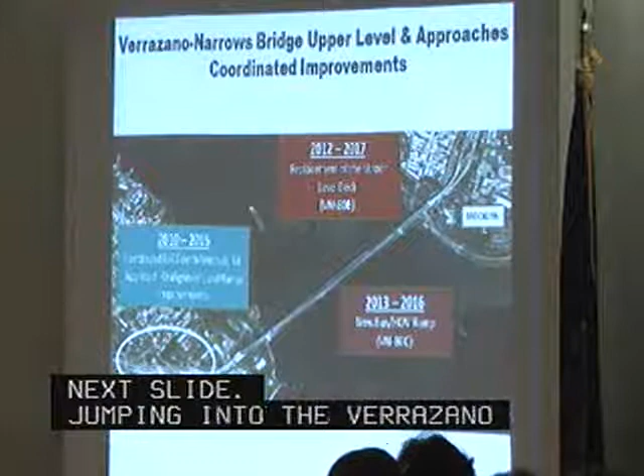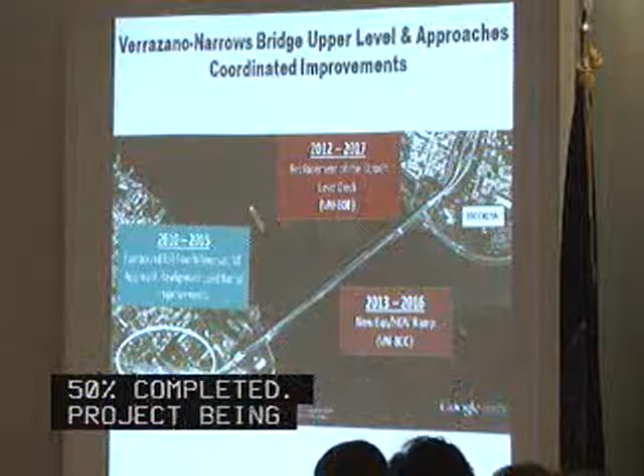So jumping into the Verrazano Narrows, this is an aerial view. To the bottom left, as you look at it, is the toll plaza area in the blue-green color. Currently, there's a toll plaza interchange project going on there. It's about 50% complete. The project's been implemented with close cooperation and under a MOU framework with New York State Department of Transportation to implement complementary improvements on the Staten Island Expressway.

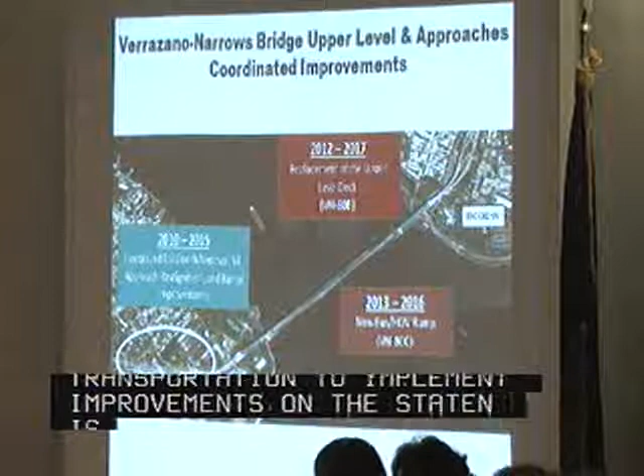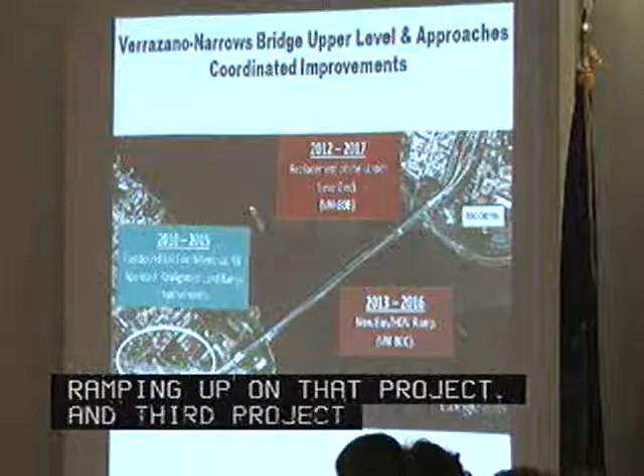The main span project on the top there that says 2012 to 17, replacement of upper level deck, is the major project we're going to be talking about today. That's VN80B. That project was awarded a few months ago. We're in the early stages of mobilizing and ramping up to get going with that project. And the third project shown there, which really should have something pointing to the Brooklyn side on the top right, is the bus HOV ramp improvement project, which we'll also discuss.

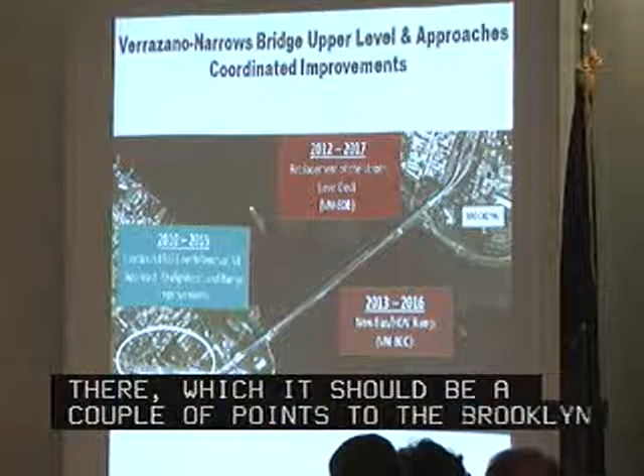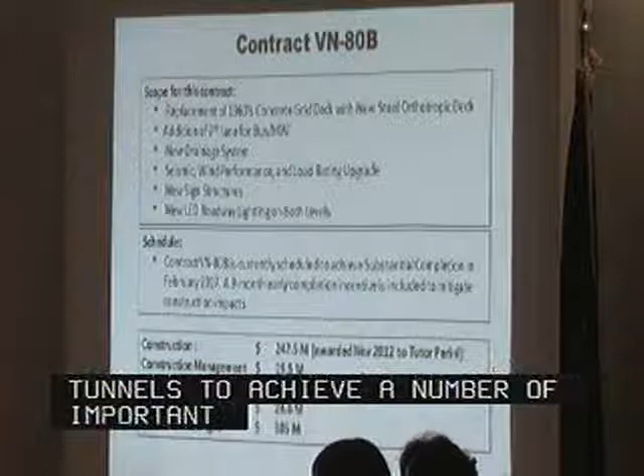Jumping into VN80B, it's a replacement of the 1960s concrete filled grid deck with the new steel deck. This project enables bridges and tunnels to achieve a number of important goals. The main one, I think, for regional importance is, by reconfiguring the upper level geometry, we were able to add a seventh lane on the upper level, and as you will see, that allows us to create a reversible bus HOV lane on the upper level of the bridge.

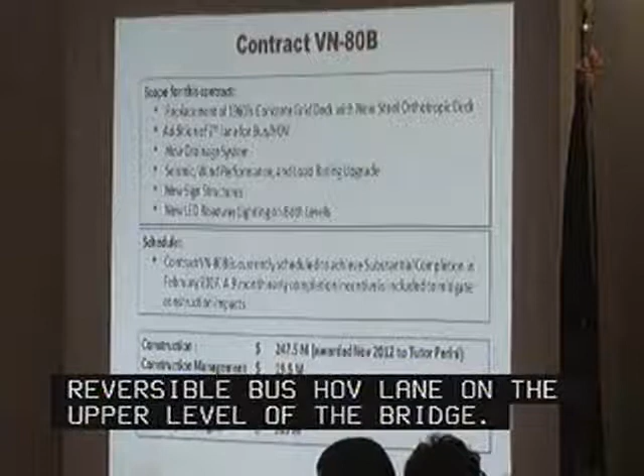We're replacing the drainage system. We're upgrading seismic, wind performance and load rating of the structure, which will help with its long-term resiliency and performance, and new sign structures and new energy-efficient LED roadway lighting on both levels will also be implemented as part of this project. I mentioned the project was recently awarded. You can see the budget information on the bottom. Overall budget, $305 million.

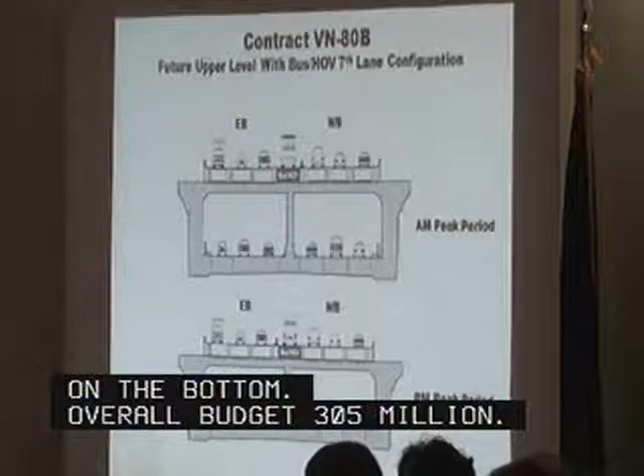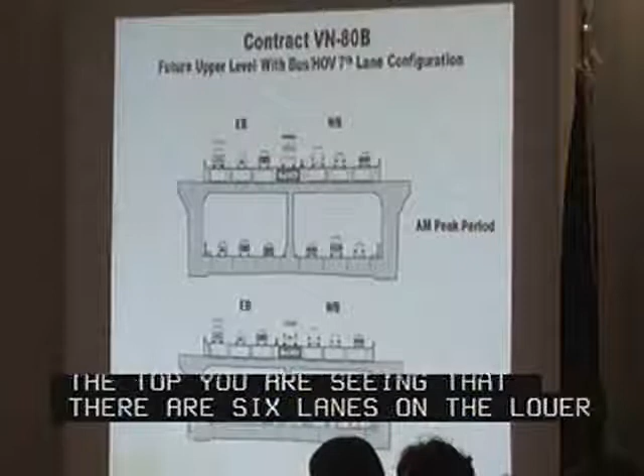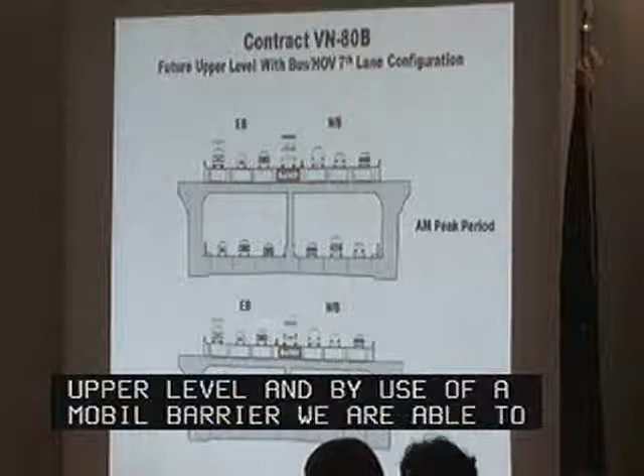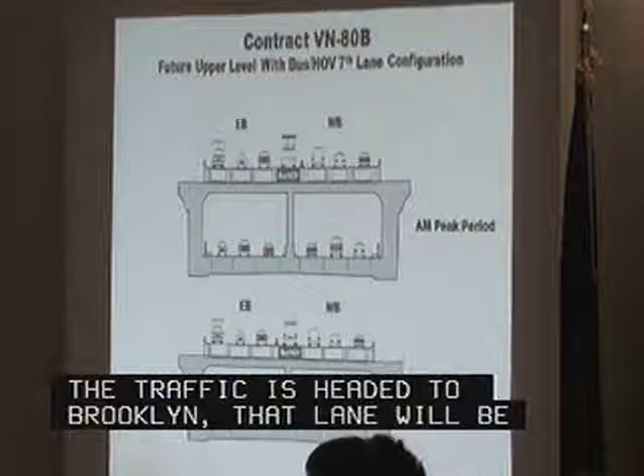This cross-sectional view on the top, you see that there are 6 lanes on the lower level, eastbound, westbound. Nothing changed there. But on the upper level, you'll see there's a new lane, so to speak, that's created in the center by taking out the median that currently exists on that upper level, and by use of a movable barrier, we're able to create a 7th lane. And in the AM peak period, when traffic is heading from Staten Island to Brooklyn predominantly, that lane will be operated to favor the predominant traffic direction towards Brooklyn, and conversely in the afternoon, evening rush hour, it will favor the Staten Island bound outbound traffic.

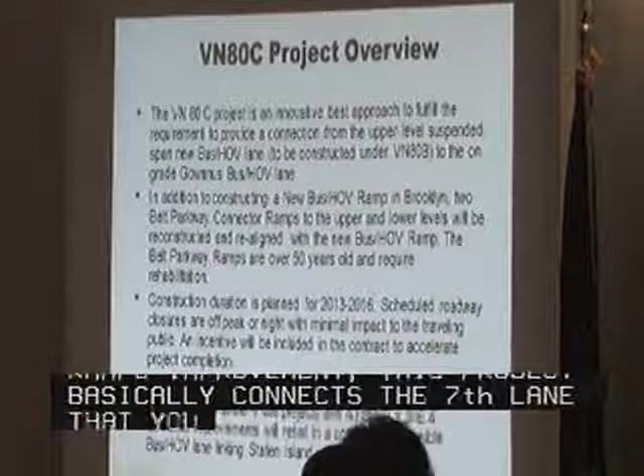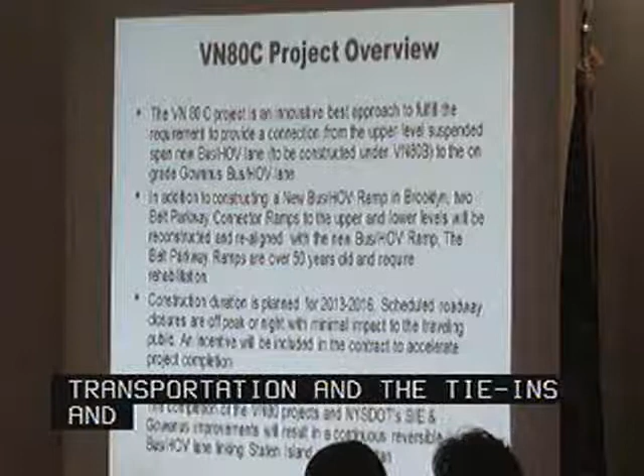The VN80C project I mentioned, that's the bus HOV ramp improvement. This project basically connects that 7th lane that you just saw from the upper level and takes it all the way down to the Gowanus Expressway, where it joins up with improvements that are currently underway being implemented by New York State Department of Transportation. And again, the tie-ins and the work necessary for the two projects to dovetail have been worked out in detail between the two agencies and are part of a regional agreement and MOU for these improvements.

The project involves creation of a new ramp, which you'll see illustrated in the next slide, and it is currently out for bid. We anticipate getting it awarded mid this year, or by the latest 3rd quarter this year, complete in 2016. We anticipate, because it's mainly new construction of a new ramp, and it doesn't interfere with the right-of-way until you make the final tie-ins to connect to the mainline structure, that there will be minimal impacts on our customers as we're implementing the project.

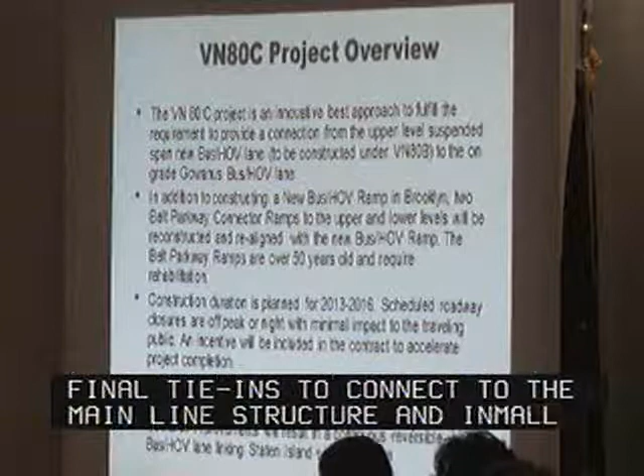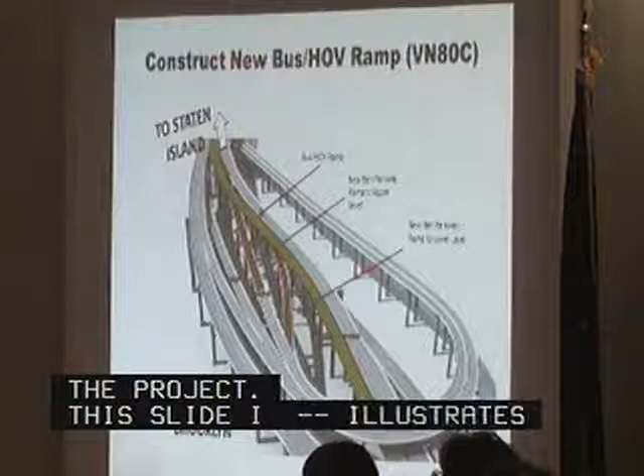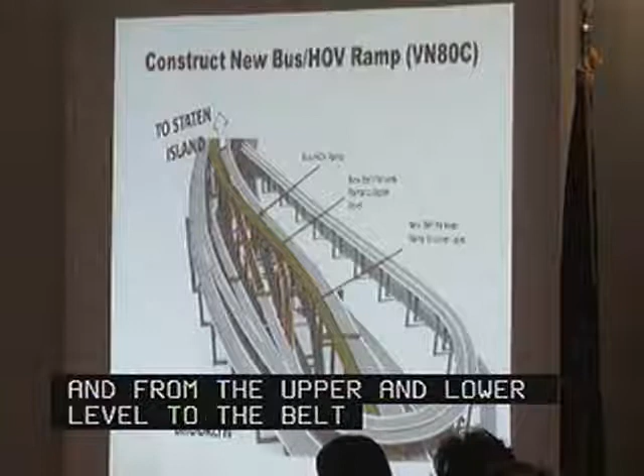This slide illustrates the ramp. Basically, what you're looking at here are the approach ramps to the Verrazano on the Brooklyn side of the bridge. There's quite a lot of ramps going to and from both the lower and the upper level of the bridge to the Belt Parkway and to the Gowanus Expressway. And highlighted in green is the new bus HOV ramp; the top of the slide is the main span, sort of the Staten Island side, and the bottom of the slide is heading towards the Gowanus Expressway in Brooklyn.

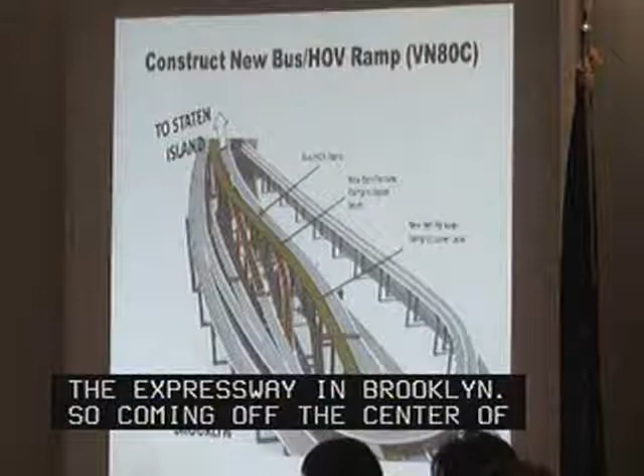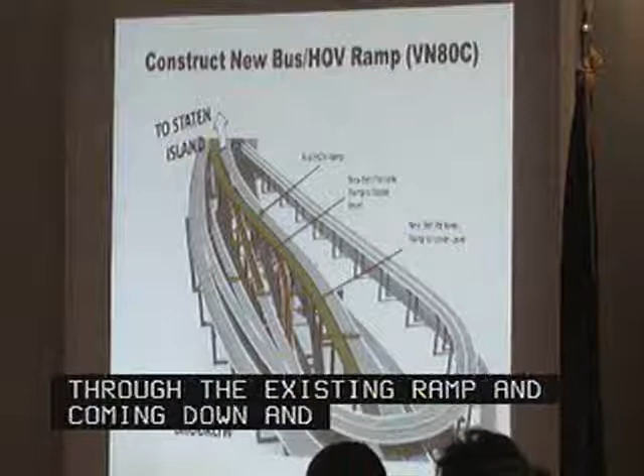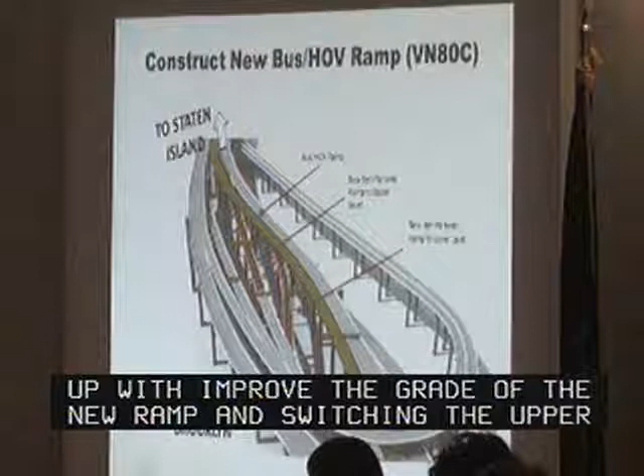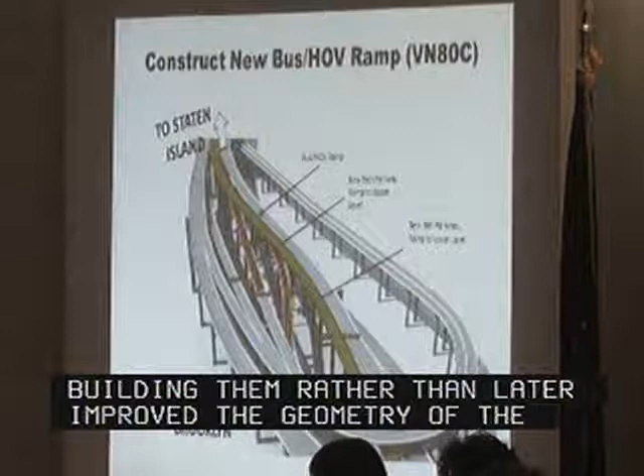So you're basically coming off the center of the upper level of the bridge that we just saw earlier, and with this new ramp, you're threading your way through the existing ramps and coming down and touching down onto the Gowanus Expressway. The two ramps that are shown in the brown color are new replacements of pieces of the existing Belt Parkway ramps. This was an innovative solution that we came up with to improve the grade of the new ramp by switching the upper and the lower level ramp connections and rebuilding those ramps now rather than later. We were able to greatly improve the geometry of this improvement, and it is an example of what we would characterize as a best value strategy in implementing the capital program. Next slide.

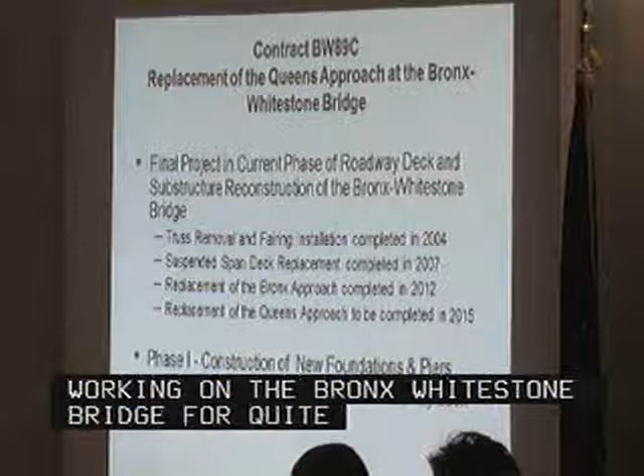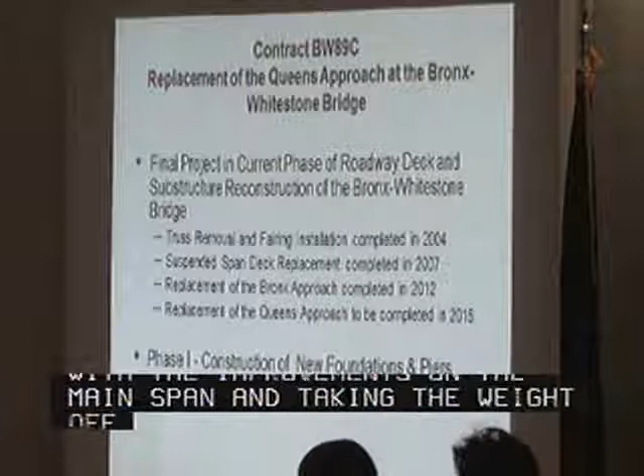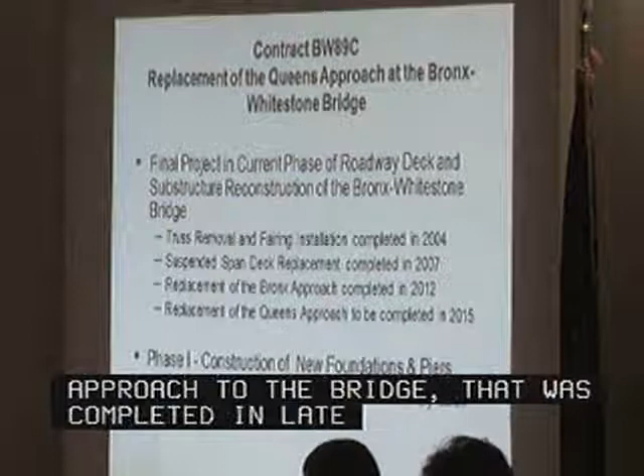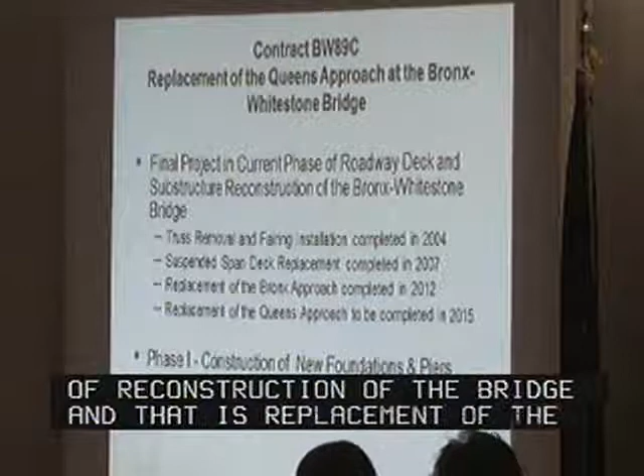Moving to the Bronx-Whitestone, as the committee knows, we've been working on the Bronx-Whitestone Bridge for quite a while. We've undertaken major work back in the early 2000s with the improvements on the main span, taking the weight off the suspended span by removing the truss, installing aerodynamic wind fairing to improve wind stability. That was in 2004. That was followed right after that by a suspended span deck replacement in 2007. We just concluded a complete replacement of the Bronx approach to the Bronx-Whitestone Bridge. That was completed in late 2012. And we're now in the final phase of the current major program of reconstruction at the bridge, and that is the replacement of the Queens approach, which is to be completed in 2015. The project really has three distinct phases.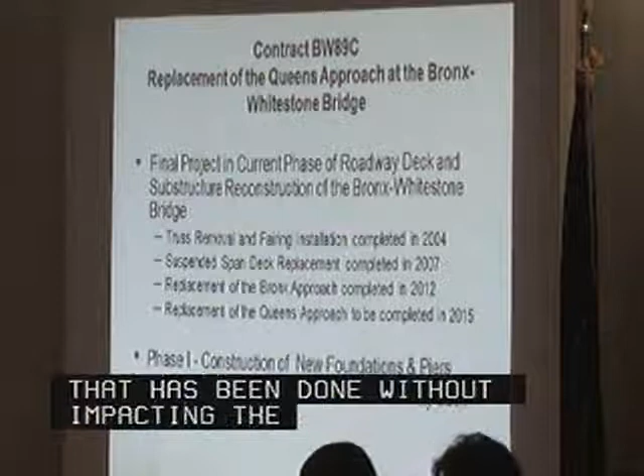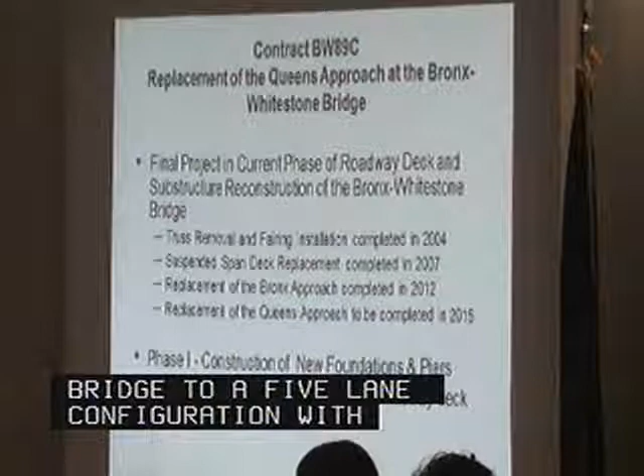We've completed the first phase, being construction of new piers and foundations. Basically, that's been done completely without impact to traffic under the existing structure. There's a phase two when we start actually working on the roadway. That's about to kick off in early June, when we'll be reducing the bridge to a 5-lane configuration with a 3-2 configuration favoring the predominant traffic direction, and a final phase 3 where we demolish the old substructure and finish out the project.

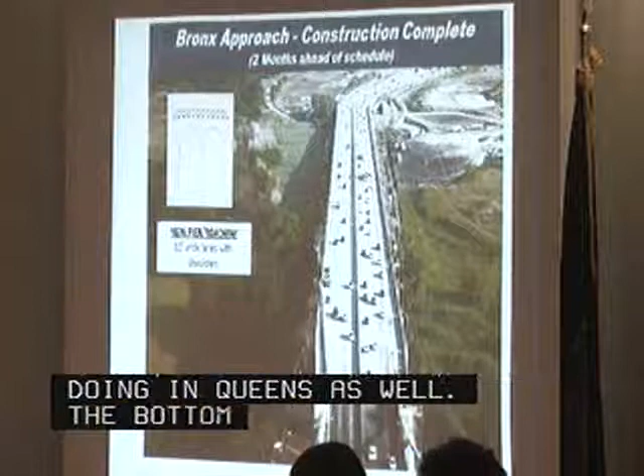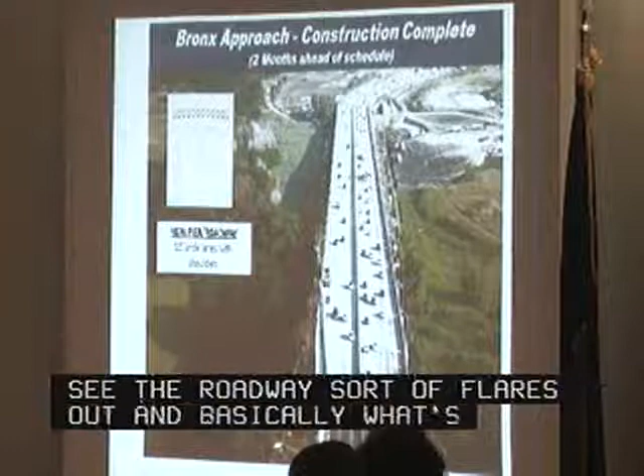This is an aerial view of the Bronx approach replacement, but it's illustrative of the kind of work that we'll be doing in Queens as well. The bottom of the picture shows the Bronx anchorage area of the main span, and then you see that the roadway sort of flares out, and basically what's happening there is we're widening out the structure to create 3 standard 12-foot lanes and a shoulder to meet modern standards. So we're having to build out from the existing choke point at the suspended span and create a wider structure.

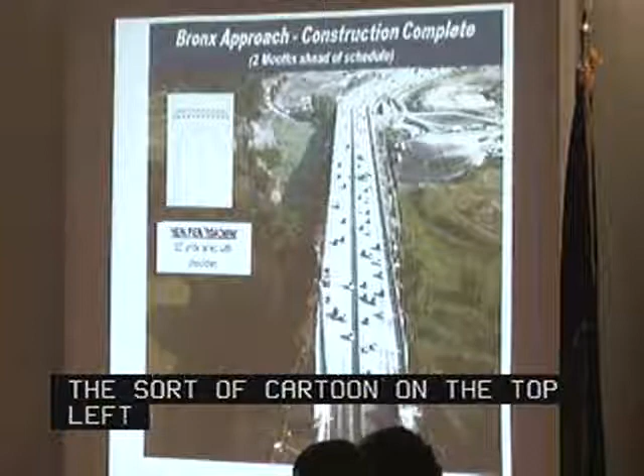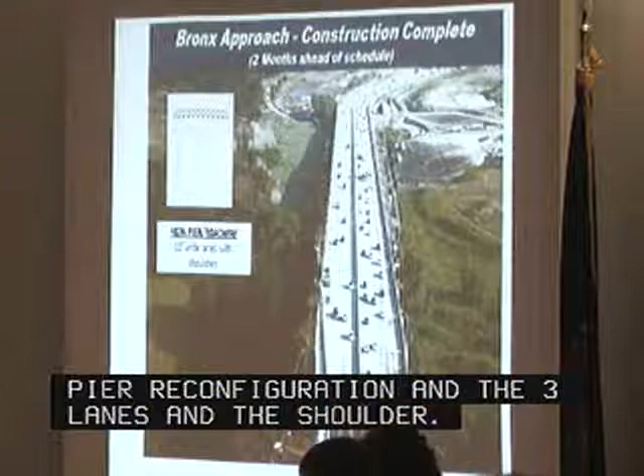The sort of cartoon on the top left illustrates the new 3-pier configuration with 3 12-foot lanes in each direction and a shoulder. The 3-pier system represents a big improvement in the redundancy and the resiliency of the structure. It used to be a non-redundant 2-pier structure.

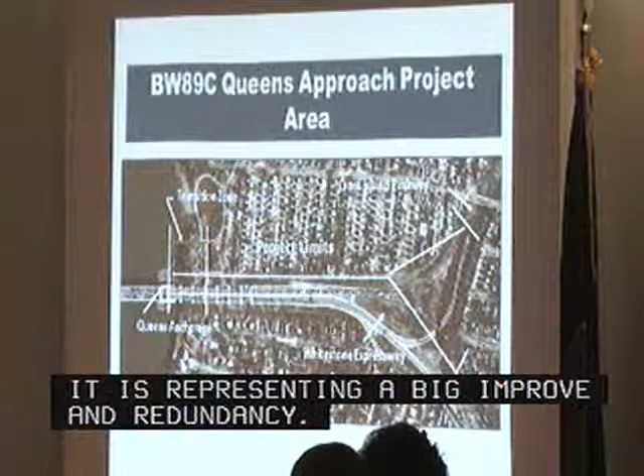The project that we're talking about today, the Queens approach replacement, these are the project limits. Basically, to the right, you have the ramps coming off the Cross Island Parkway and the Whitestone Expressway. These are on-grade ramps that are also being rehabilitated as part of this project. And then you have about a 1,000-foot long viaduct structure that's being completely replaced. And the project limits are more or less at the Queens anchorage on the left side of the slide.

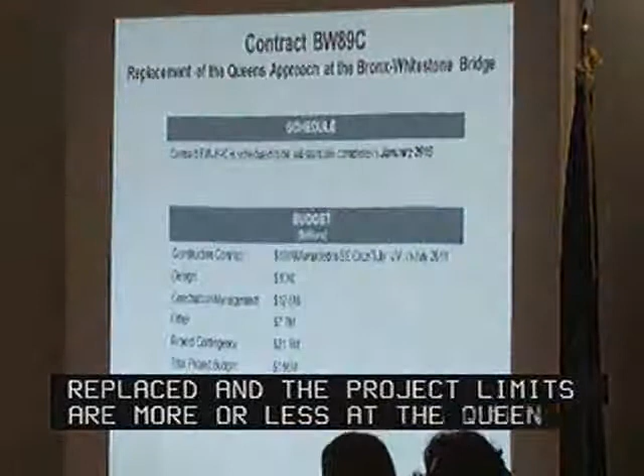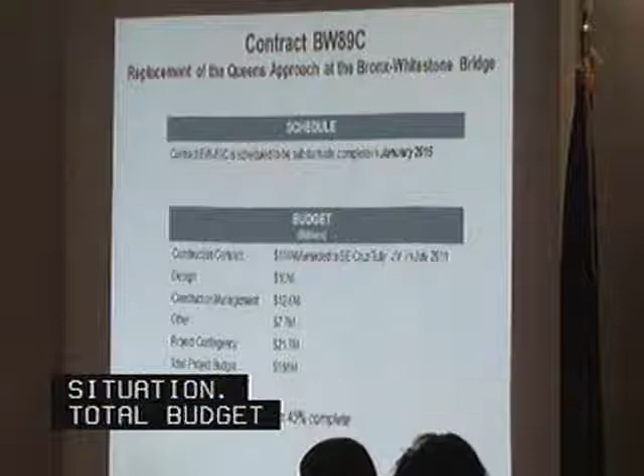And this shows the budget situation. Current total budget's $166 million. Project's about 45% complete. We're still on target to meet the substantial completion date of early 2015.

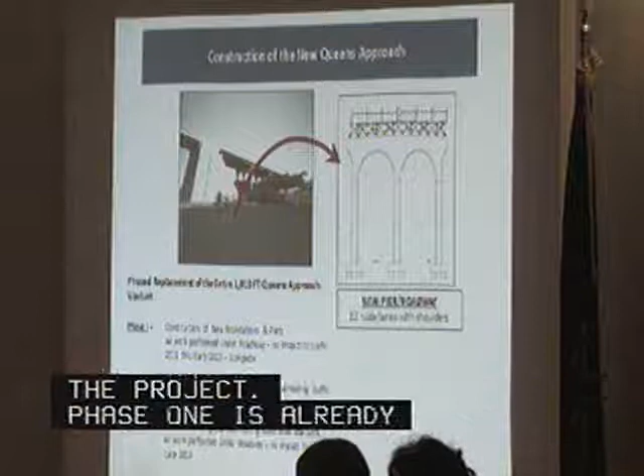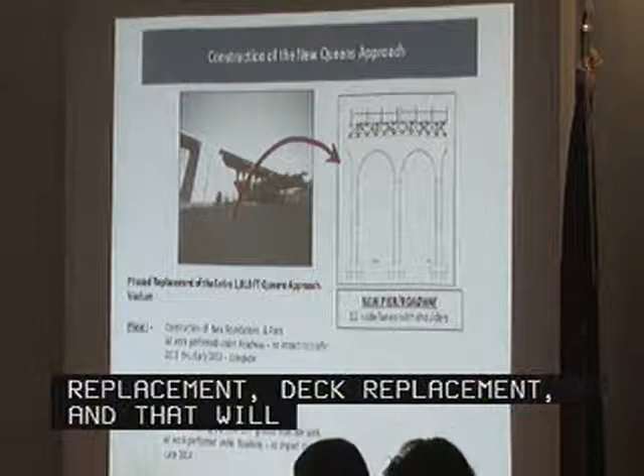Again, this sort of illustrates the three phases of the project. Phase 1 is already complete. The new piers have been installed, and now we're starting the roadway deck replacement, and that will run into late 2014, and then we'll finish up by 2015 with the final phase of the project. And again, we'll have 3 standard 12-foot lanes and shoulders on the Queens side as well.

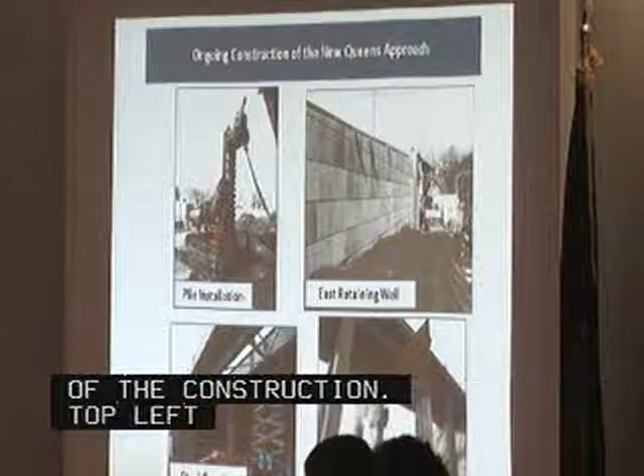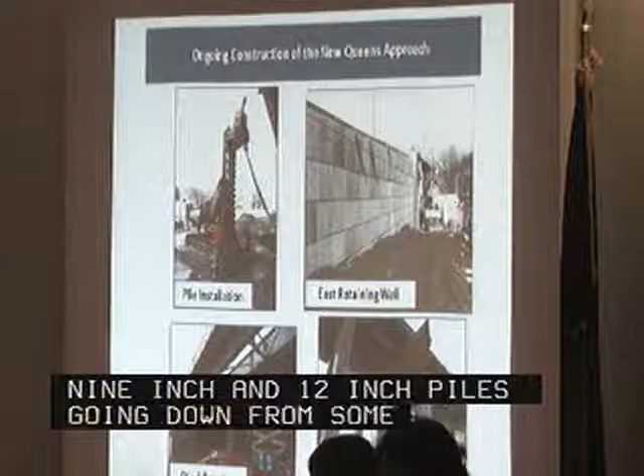Just some photos depicting some of the construction. The top left, you have the augering in of the mini piles. The mini piles are 9-inch and 12-inch diameter piles that go down, some as deep as 85 feet. They're installed in clusters and provide the substructure support for the new pier system. The top right is the new retaining wall being installed.

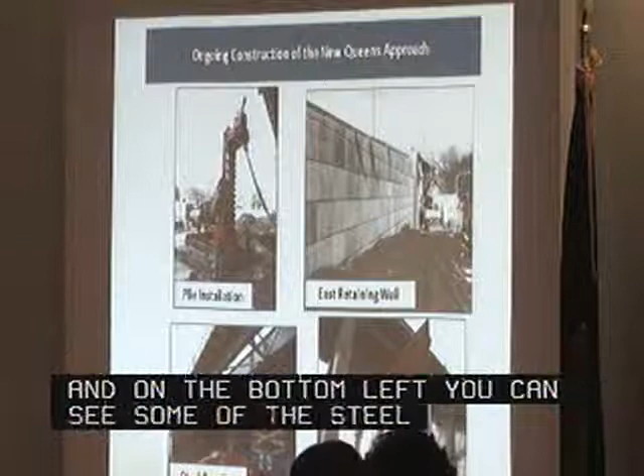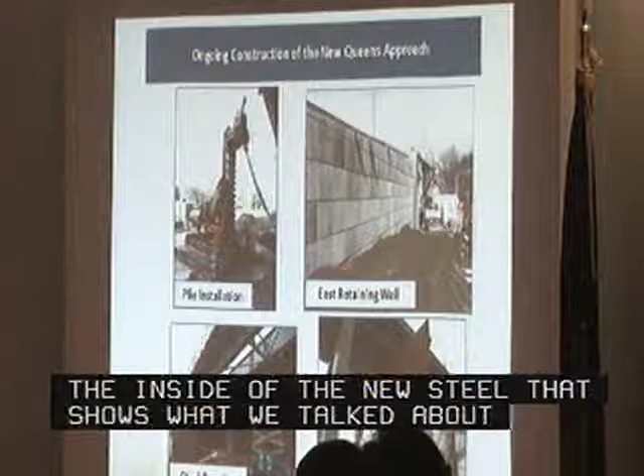And on the bottom left, you can see some of the steel erection work going on. You can see in that picture the existing pier sort of on the inside of the new steel. That shows what we were talking about, that the existing structure is being maintained in place while traffic runs on it, while the new structure is coming out of the ground literally underneath the structure, and eventually we transfer the loads over and put the new structure in place, and then we can rip out the old substructure.

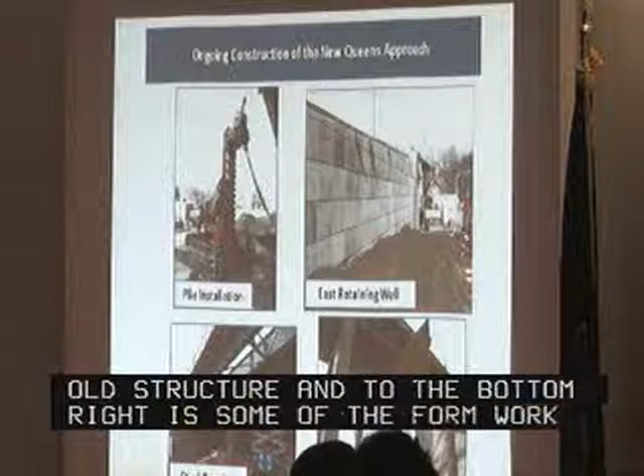And to the bottom right is some of the formwork for the concrete for the new piers being set in place, where again you can see the new substructure being built under the old existing structure.

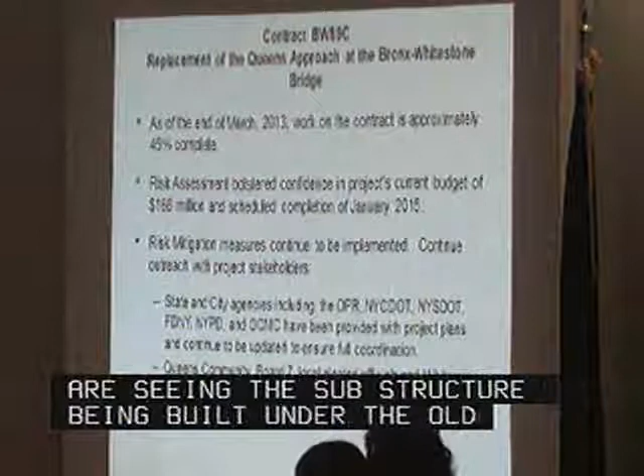Okay, so just to recap where we are with the project. As of this month, we're 45% complete. This project was previously presented at CPOC as part of a risk assessment presentation. The risk assessment helped bolster our confidence in the current budget and our ability to finish the project within the current budget. And happy to say that with 45% complete, we're doing very well with that.

We continue to monitor the risks on the project and try to stay proactive. The two things we're highlighting at the bottom that I think have been key to the success of the project so far: a very active interagency coordination effort. One of the features of this project is we had to relocate a children's playground that was immediately under the structure in Queens.

We worked very hard with the city agencies, principally Parks Department, and also the local community to find an alternate location that was suitable, and that has proven to be very beneficial in terms of allowing construction to move ahead unencumbered by having to work around the playgrounds, and has also garnered a lot of support from the local community because we were able to do that as part of the project.

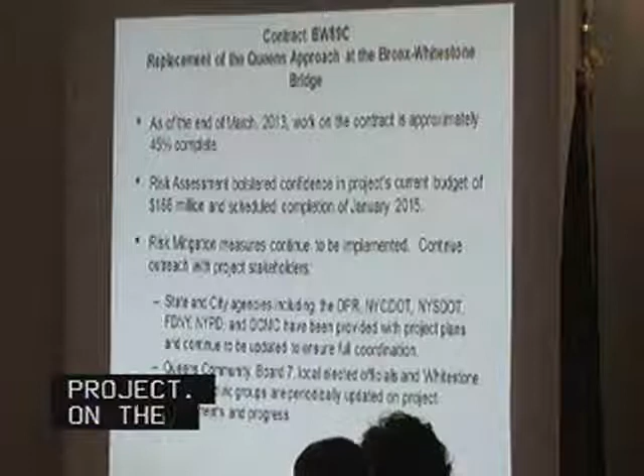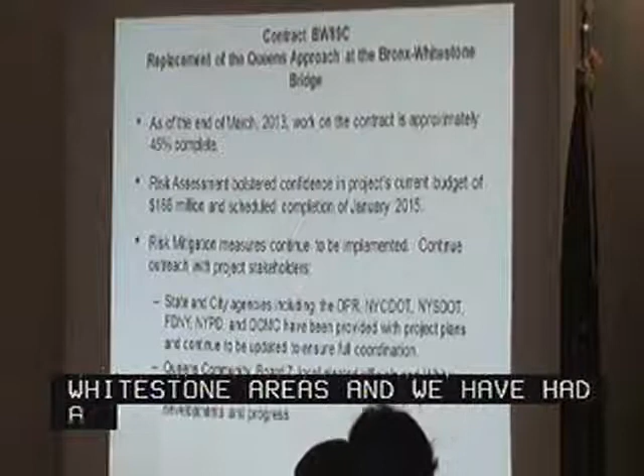And then on the bottom, I think the project definitely is a challenging project because we're working at close quarters with the community. There's a lot of impacts to both the Whitestone and Malba areas, and we've had a very proactive outreach effort with local civic and community groups and elected officials, and I think that has been very beneficial in helping the project move along. And that concludes my presentation.

Thank you. Next is... Mr. Chairman, can I ask a question? Sure. If you don't mind. On the HOV lane crossing the Verrazano, is there an intent to have Jersey barriers or some physical impairment between the HOV bus lane and the other traffic lanes? Or is it intended solely to be paint? Okay. Because I know the difference. Yeah.

Right now, the intent is for the lane to operate pretty much the way, for example, the Tappan Zee Bridge operates, where you move the lane to favor the predominant direction, but there's no physical barrier that would prevent somebody that wants to cheat. But I believe the barrier will separate opposing moves of traffic, right? Yes. Opposing traffic only. You won't be able to preclude someone from entering the lane that shouldn't, but all that traffic's moving in the same direction. That's right. Those are two different issues. And I agree.

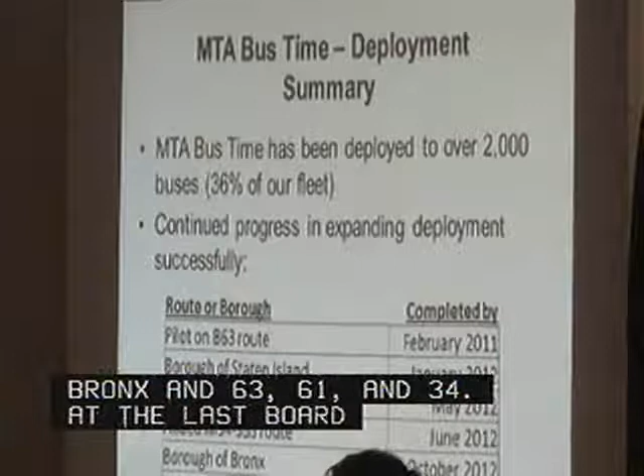With respect to usage, 94% of customers told us in a 2011 survey that they would want to see bus time available on all routes in the city. If numbers from the existing two boroughs are any indicator, text message usage for year-to-date is about 2.3 million texts, averaging about 36,000 per day, while mobile website usage year-to-date is about 5.2 million users, averaging about 77,000 per day. Lastly, the website usage year-to-date is about 589,000 with an average of 7,000 events per day.

Customer feedback has been generally very positive, with feedback ranging from great idea, especially for mobile devices, to bus time has been a real lifesaver. We occasionally get feedback like, my bus didn't appear on bus time, which we have addressed and rectified as soon as we receive them. If that happens, does that mean the transponder in that particular bus is not working? It could be a number of issues. It could be cellular connectivity, GPS, it could be hardware failure. There are a number of different issues, but we try to stay on top of that as best we can.

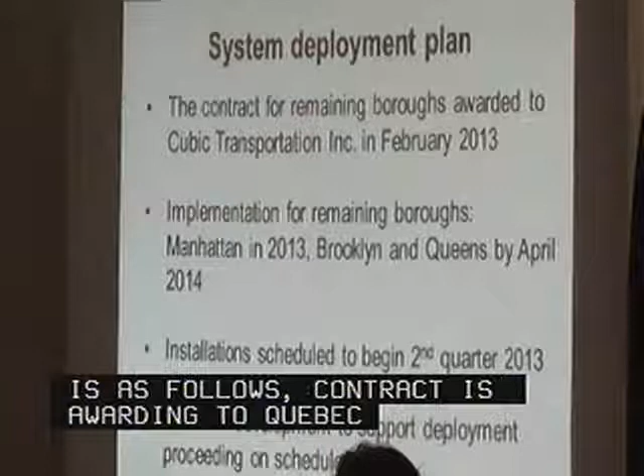The main tasks and timelines for system deployment are as follows. The contract for the remaining boroughs has been awarded to Cubic Transportation in February 2013. We are working to make sure that we have MTA bus time deployed to Manhattan in 2013 and the boroughs of Brooklyn and Queens by April of 2014. The installations are scheduled to begin in the second quarter of 2013. All of the necessary software development to support the wider deployment is proceeding on schedule.

Again, the customer outreach informing customers about the MTA Bus Time deployment will remain similar to the efforts that we have performed in Staten Island and the Bronx. The efforts include exterior and interior bus ads announcing MTA Bus Time, an advance notice poster deployed prior to launch, a how-to brochure that will be published explaining the program and educating customers how to use the system, and of course, new Guide-a-Ride bus schedule inserts will be deployed to all the stops. In addition to the above, the MTA website and homepage will be updated with the relevant information.

Total cost to implement MTA Bus Time is $60 million and is within our budget projections. The cost includes on-bus hardware costs covering installation, warranty, and maintenance for a period of 3 years, all software contract costs that will support MTA Bus Time expansion to all buses in all boroughs. The cost also includes software costs covering development, hosting, and maintenance, and includes our initial implementation costs for text messaging and wireless carrier costs at $25 per bus, derived from the state contract pricing. Please note that text messaging and wireless carrier costs will become operating costs after the deployment is completed.

Moving forward, we aim to ensure successful citywide implementation on all 5,700 buses by April 2014. We will also make sure that the MTA Bus Time platform is designed to be open, thus supporting other bus technology enhancements in the future. A case in point is the recently deployed traffic signal priority project that we worked on with City DOT and is on the SBS 15 route. In addition, we are also making sure that MTA Bus Time information is also available to other relevant customer information channels like the On the Go kiosks. We are also working on fully incorporating the real-time location information from MTA Bus Time into our daily operational and service management decision-making. Thank you.

All of the equipment for the VHF radio contract has been approved, and the contractor is working at all 4 initial build sites. During the next 6 months, we will complete both the preliminary and critical design reviews, conduct the various system and equipment tests, and complete the equipment installation at the 4 initial build sites. Work on the critical milestones is progressing on schedule, and there are no major issues to report. Thank you. Yes, the independent engineer agrees with the cost and schedule of this project and the characterization by the transit agency. Thanks.

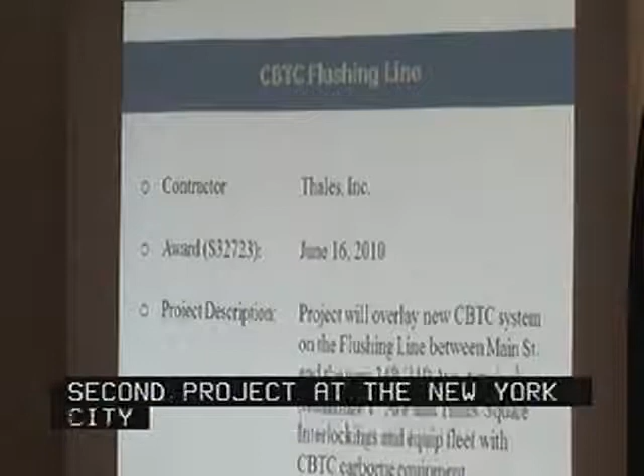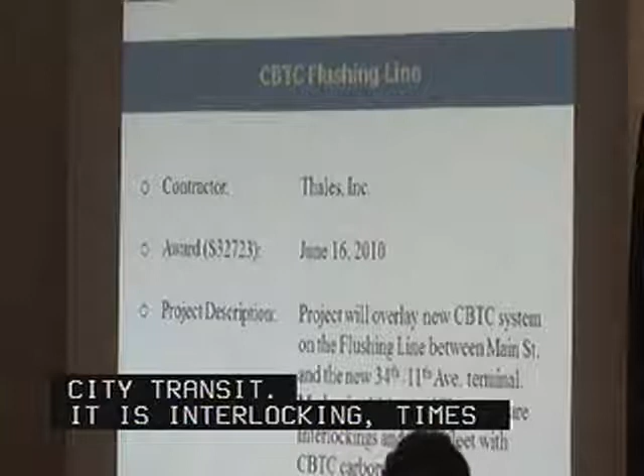Signals and train control division. Yes, sir. Good afternoon. I'm Nitish Patel, Program Officer for Signals and Train Control. Today I will brief you on the status of several of my CBTC and signal projects. The Flushing CBTC project is the second CBTC project at New York City Transit. This project will modernize 2 interlockings, 11th Avenue and Times Square. All other interlockings will be made CBTC ready, and CBTC will be overlaid on the entire Flushing line, including the 34th Street extension. This contract will also equip 46 trains with the CBTC equipment. This contract activity does not cause any delay to the opening of the 7-line extension.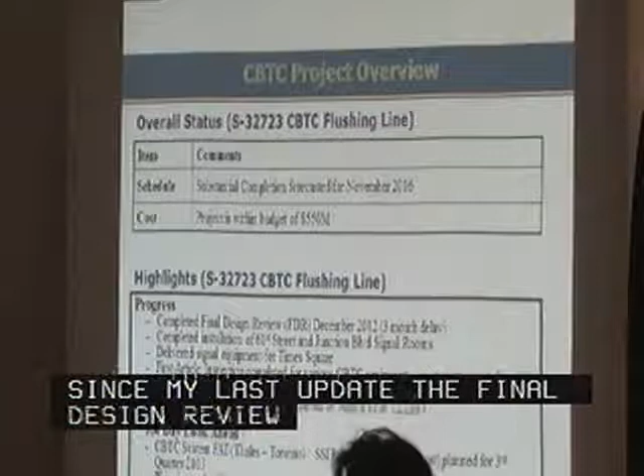The CBTC project on the Flushing line continues to remain both on schedule and within budget. Since my last update to you, the final design review was completed. Rooms at 61st Street and Junction Boulevard have been erected, and the equipment for Times Square interlocking has been delivered. Over the next several months, factory acceptance testing for the CBTC and SSI equipment will commence, and the new interlocking at Times Square will be placed in service.

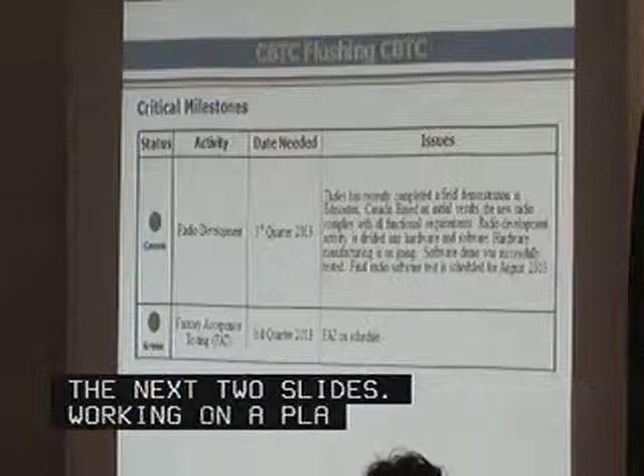A risk assessment workshop was conducted on March 11th and 12th by an MTA consultant. A draft report was received, and NYCT is currently reviewing the project and the report. Two major areas of concern are track outage availability and the availability of all CBTC equipped trains to start the final cutover. I will talk about these two during the next two slides. NYCT is working on a mitigation plan and will share it with the risk assessment consultant in the next few weeks so that they can finalize their final report. And I will share with you the final report and their findings in the next meeting.

As I reported last time, radio development is critical, but the way we developed the radio, we divided the radio communication system into two components, hardware and software. The hardware manufacturing is ongoing and software development is on schedule. The second critical milestone is the factory acceptance testing for CBTC system software, which is also scheduled for third quarter of this year.

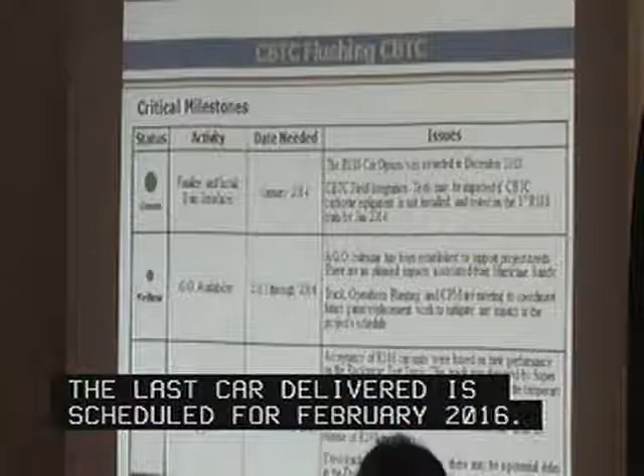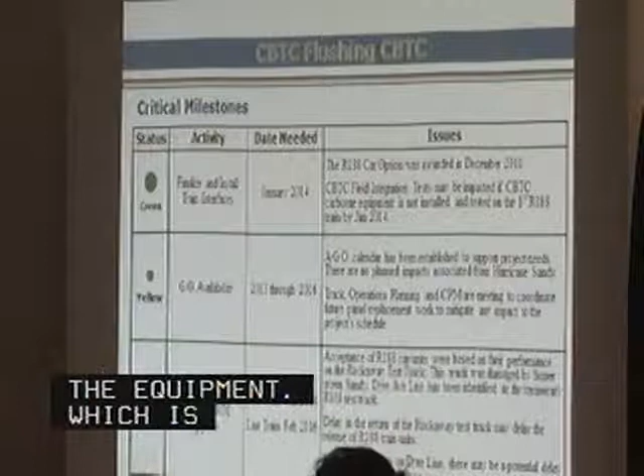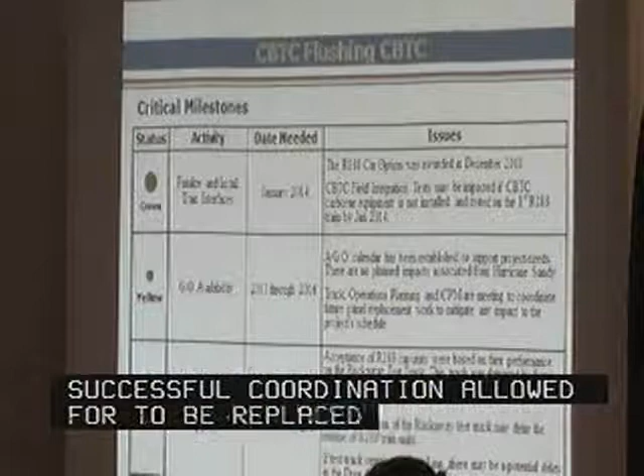These are the other three critical milestones we monitor all the time. The first one is the installation of the CBTC equipment on the first train, which is planned for the first quarter of 2014. Currently, there are no issues with the interfaces, and hence the delivery of the first train for CBTC testing. The second critical activity is the GO availability. NYCT continues to coordinate the signal work and track work. Successful coordination between the track and CBTC contractor allowed for over 30 panels to be replaced in 2013. And we're going to continue to work closely with all the parties to maximize the GO piggybacking opportunity.

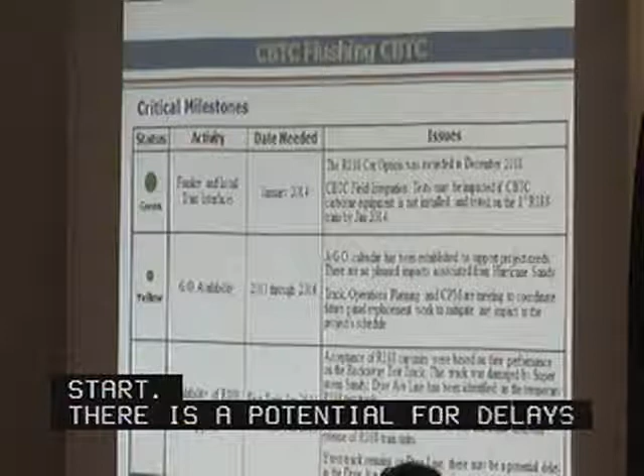Getting the last train in February 2016 is critical for this project because once we have all the trains, 46 trains, the final cutover and the removal of the existing signal can start. There is a potential for delays for the acceleration and braking test due to the damaged test track in the Rockaways because of Superstorm Sandy. At this time, the Dyre Avenue line is utilized for testing to minimize the impact on the Kawasaki car contract schedule.

The next project is the CBTC Culver Line Integrated Test Facility Project. NYCT awarded this contract to Siemens Thales Consortium in September 2011. In the next few capital programs, NYCT will be focusing on modernizing the B division, primarily the IND, using CBTC technology. Due to the diverging routes and not having a dedicated car fleet for each line, future CBTC equipment must be proven to be interoperable and safety certifiable for safe passenger operation. This project will update and finalize CBTC interface and interoperability standards and develop two safety certifiable CBTC systems. Also under the same project, the contractor will provide an integrated test facility at 2 Broadway and a test track on the Culver line, which can also be used to qualify additional CBTC suppliers.

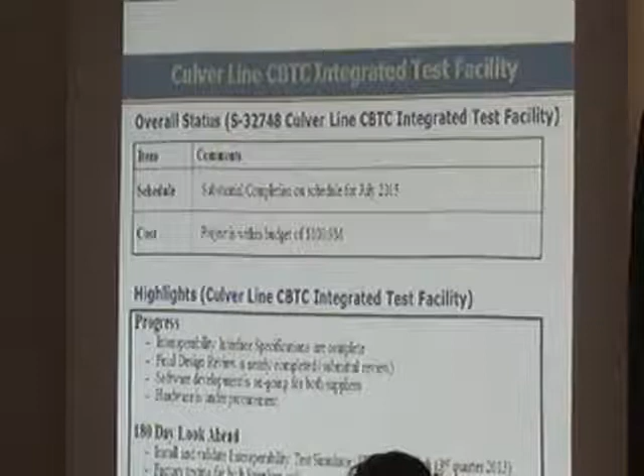This project is within the schedule and budget at this time. The project is progressing well. Final design review is almost complete and hardware procurement is ongoing. Factory acceptance testing is planned for the third quarter of 2013 and interoperability testing is planned for the end of this year. Both critical milestones, availability of the test facility and the factory acceptance testing, are on schedule.

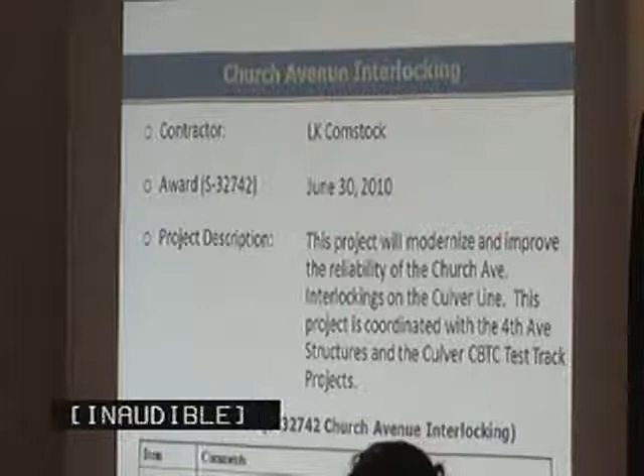There are several conventional signal projects which I will briefly update you on. The first is the Church Avenue interlocking. This project was awarded to LK Comstock in June 2010 and is for modernizing the interlocking at Church Avenue on the Culver line. This project is on schedule and within budget. This project is successfully coordinated with the 4th Avenue Viaduct project.

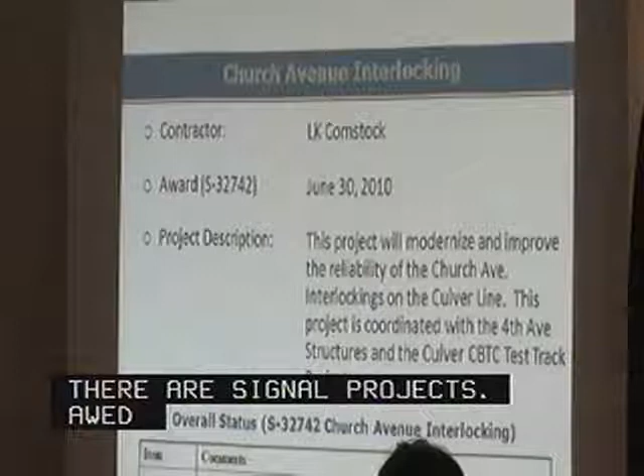In November 2012, we awarded two signal interlockings, Union Turnpike and 71st Avenue, on the Queens line to Five Star Electric. You're going to want to change that slide because you have 71st Street in two places instead of 71st Avenue. That's correct, right?

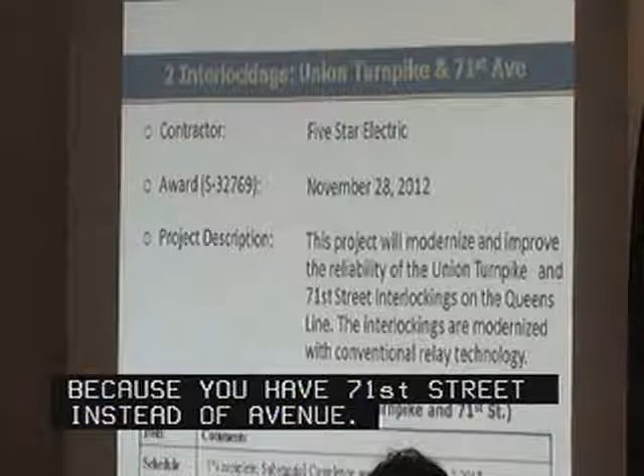The next slide. In January 2013, we awarded Roosevelt Avenue interlocking contract on the Queens line to 5 Star Electric. These 3 interlocking bids were competitive thanks to the addition of the 3rd signal supplier, increasing the competition spectrum.

Last month, we opened the Dyre Avenue line signal modernization contract. This project will install 2 different solid-state interlocking systems, the first at Dyre Avenue and the other at Morris Park. The low bidder is JTJ Contracting. The qualification hearing is ongoing, and the project is scheduled to award by end of this month.

Currently in design phase, we are doing the design for the 34th Street and West 4th Street interlocking projects. Both projects are planned for award 4th quarter 2013 and 1st quarter 2014 respectively. So by 2014 1st quarter, Signals and Train Control will have awarded $1 billion in signal modernization projects. That concludes my presentation. Thank you.

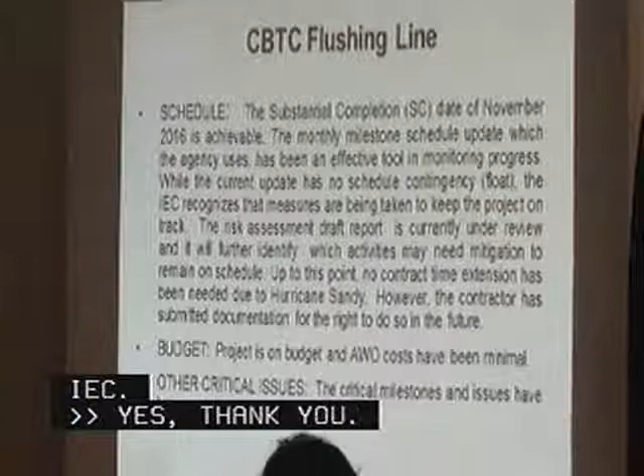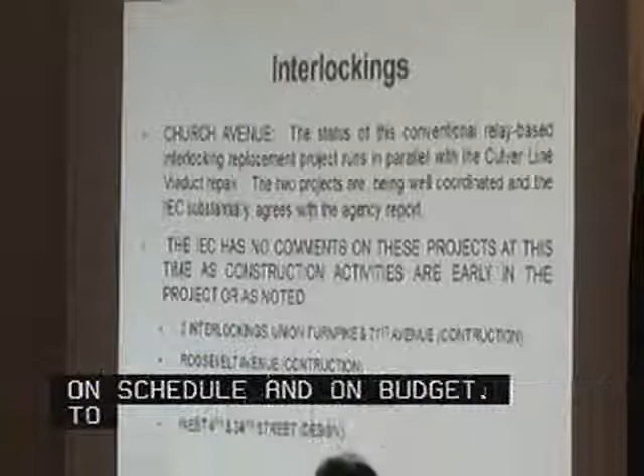IEC? Yes, thank you. On the CBTC project, the independent engineer finds that while there's no schedule contingency on this project remaining, Transit is effectively managing the project and it remains on schedule. The project is on budget. On the Culver CBTC test line, the project is on schedule and on budget. We have no additional comments there, nor on these new interlocking projects as they're at such an early stage. Thank you.

Thank you. Finally, capital program commitments and completions, our COO, Nuria Fernandez. Thank you very much, Mr. Chairman. I didn't think I had slides, but I do. No slides. Please get the lights. Thank you. If you will refer to section 4 in your books.

As you all may recall, our goal for our capital program in fiscal year 2013 is to award design and construction contracts in the aggregate amount of $5.49 billion. Our commitments through March, that is for the 1st quarter of this year, were forecasted at $1 billion. Today I'm reporting on the status of 10 major projects, commitments through the end of March. Of these, 8 were awarded on time and within budget, and 2 other major projects have been delayed through June.

This 1st quarter, the operating agencies committed $1.1 billion, which is $100 million over what we had anticipated. This happened partly as a result of Long Island Rail Road awarding a large part of its 2013 track program ahead of schedule. Also, the brick arch ceiling repair contract at 168th and 181st Streets stations was $16 million higher than what was budgeted. So I want to draw your attention to page 4-2, the frame that refers to budget analyses. It shows year-to-date actual versus budget.